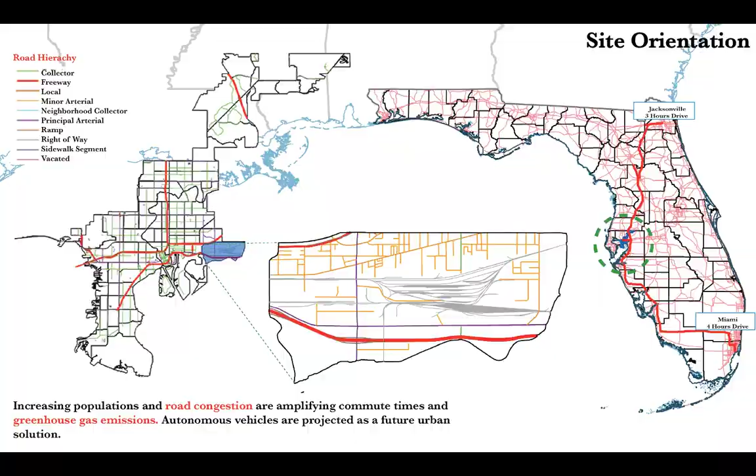Some of the existing issues that we currently have on the site include abandoned roads, unsafe exits, unfriendly pedestrian intersections, and a large parking lot that we're going to talk about later.

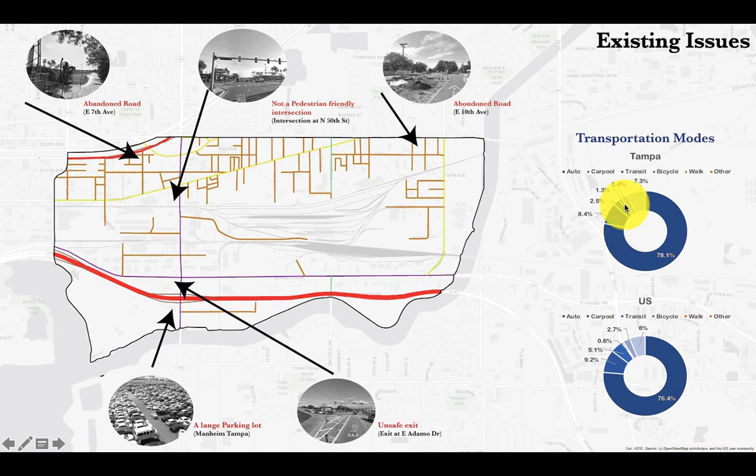To compare the transportation modes for Tampa and the United States, we see that for auto, Tampa has a higher average than the average of the United States, and has a lower percentage for carpool and transit than the average for the United States.

All roads lead to Tampa. It's important to note if our site actually allows for autonomous vehicles if we want to propose autonomous urban solutions. Since 2012, autonomous vehicles have been lawfully allowed on Florida highways, and in 2019, testing of autonomous vehicles was allowed without drivers.

As you can see in green is the Selmon Expressway, which runs through our site. It's a perfect testing bed because it allows reversible overhead lanes, which means that traffic is allowed to flow in different directions depending on the volume of traffic at any given time.

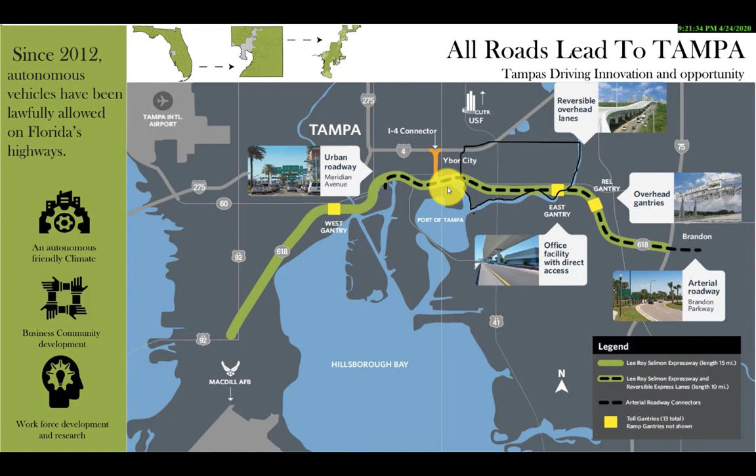Also, it's an urban roadway which allows for diverse modes of transportation and leads to major nodes: downtown Tampa, and the airport. There are overhead gantries to monitor the systems, and office facilities to help navigate the system. Also, it's important to know that this is a major arterial way.

Each year, there is an estimate of 1.2 million deaths worldwide caused by automobile collisions. These levels of automation, shown on the left, and when they were released to the public, shown on the right, were made to reduce this number.

Today, we most commonly see levels 0 or 1 on the road. Level 0 warns the driver of lane departure and blind spots, and level 1 includes features such as cruise control and brake support. For our design proposal, we would like to implement level 4, which is full self-driving capabilities.

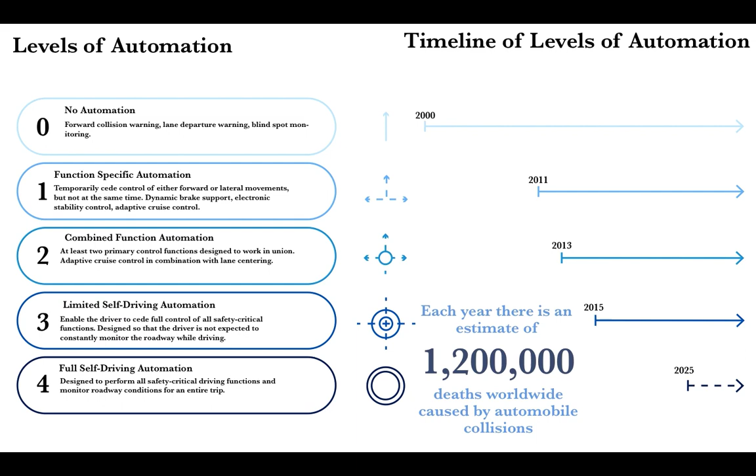We know that there are many pros to implementing autonomous vehicles into everyday lifestyle, but there are also some cons. Starting with the pros, autonomous vehicles are proposed to speed up traffic by 35%, reduce car wrecks by 81%, and reduce fuel consumption by 90%.

On the other hand, autonomous cars have a possibility of being hacked to get a hold of users' personal information and even control of the car. Another con is that with the introduction of autonomous transportation, there is no need for driving jobs, and the result of this is a proposed loss of 1 million jobs. Lastly, the average autonomous car costs about 10 times as much as today's average car.

Transportation is a major contributor to greenhouse emissions. Transportation is the largest source of planet-warming greenhouse gases in the United States, contributing to about 1/3 of those greenhouse gases, with electricity coming a close second. This shows that for industry to be lower, there are more sustainable practices involved.

Part of this 1/3, 250 million passenger cars contribute to 60% of the emissions from transportation, 17% from ships and planes, and 23% from freight vehicles. Between 1990 and 2017, there has been a 22% increase in greenhouse emissions from transportation.

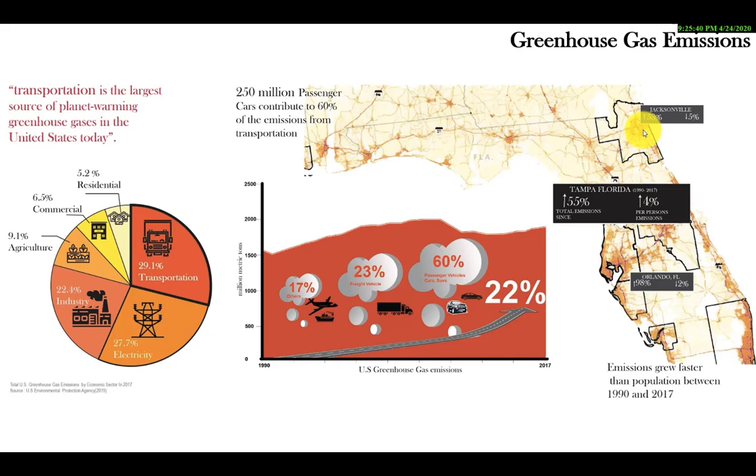In comparison to other cities, Jacksonville had a 53% increase but a 5% decrease in per person emissions, which is the same for Florida overall, meaning that fewer people are using cars, but the population has probably increased in those areas. So after looking at the existing issues, we wanted to know more about Tampa and our site.

So we did a suitability model following those 4 steps. First we identified the related factors, geographic information and traffic related, looking at data cleaning, data organization, and literature review. Then we collected the data for geographic.

We looked at the land cover, population density, building density, and schools. For traffic, we looked at the annual average daily traffic, commute time, and speed limit. Then we created a rating system from 1 to 5, 1 being the least and 5 being the most.

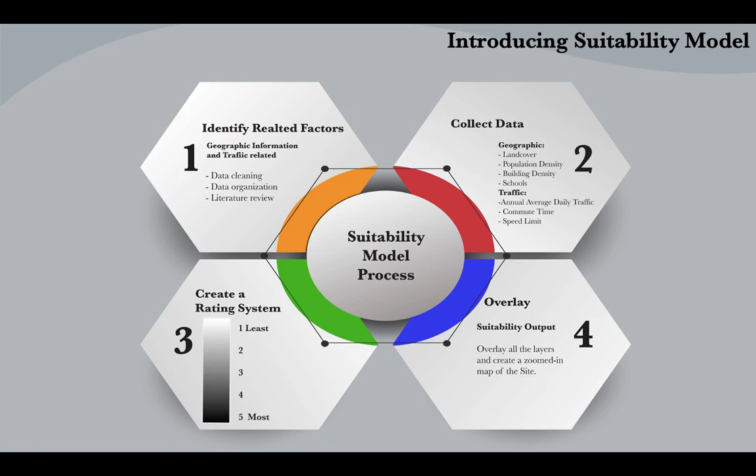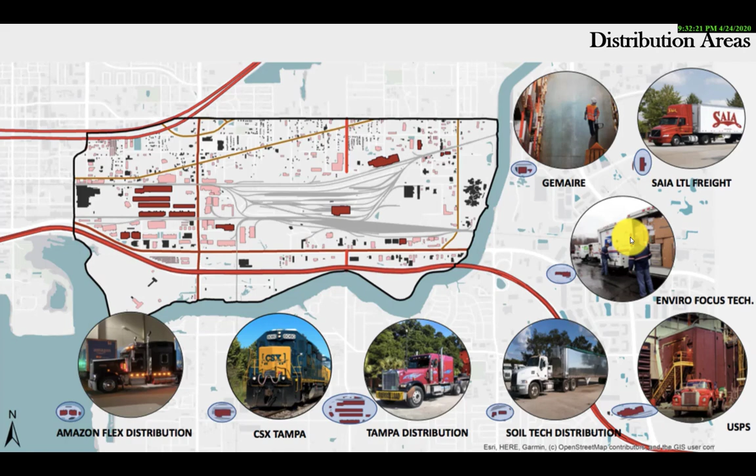This map shows the road hierarchy highlighting the current freeways, principal arterials, minor arterials, collector roads, local roads, and railroads in our site. As you can see, there are two main freeways that run through our site, which makes our site a good location for the introduction of autonomous vehicles in Tampa.

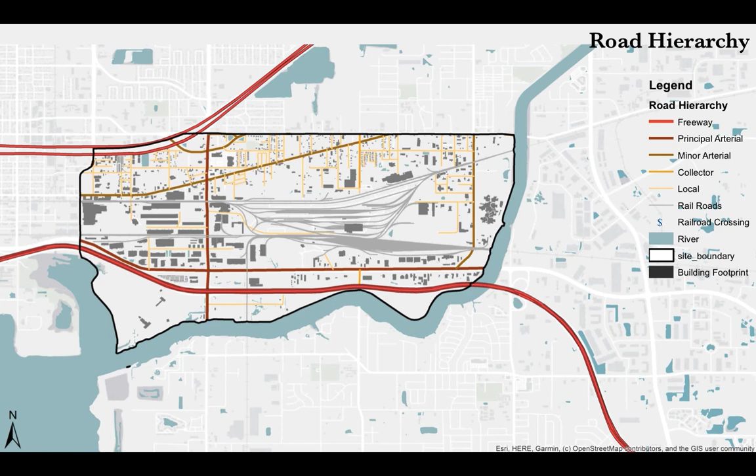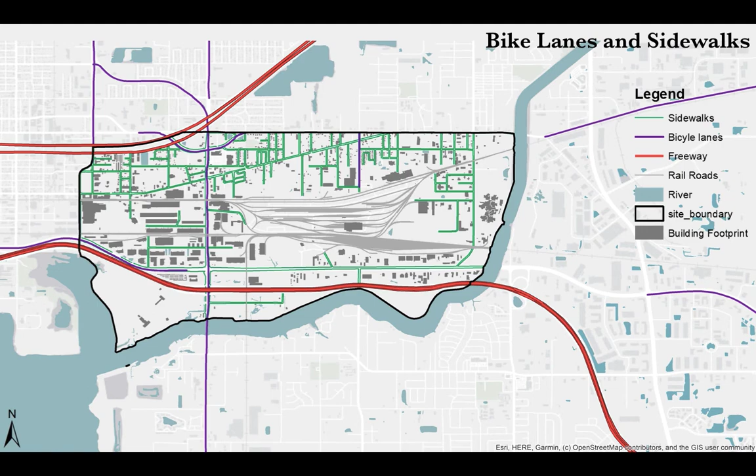This map shows the existing sidewalks and bike lanes in our site. As you can see, there are very few bike lanes located in our site. This is another site issue we are going to fix.

Here we show existing bus routes, and we have the HART Limited Express routes, which runs along the Selmon Expressway. We have 60LX that runs from Fish Hawk to South Tampa. We have 24LX that runs from Bloomingdale to South Tampa.

We have the Cross County line. We have the Brandon and South Tampa lines. Also, we have the HART Local routes that run through N50th Street along our site, and you can see that we have different bus stops along this route.

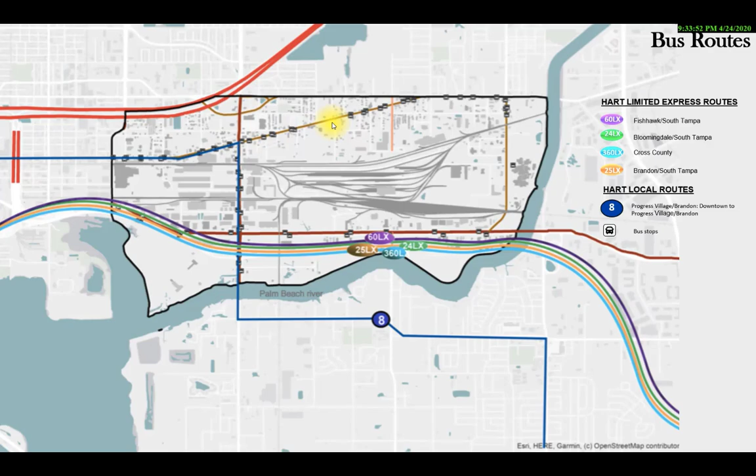This is the existing cross-section of the Selmon Expressway located in our site. As you can see, there are two levels to this freeway, one main upper level that has 3 lanes and two lower levels that have 2 lanes.

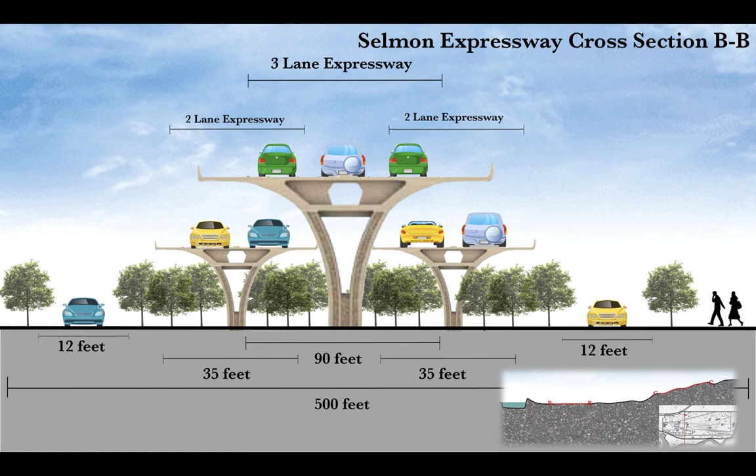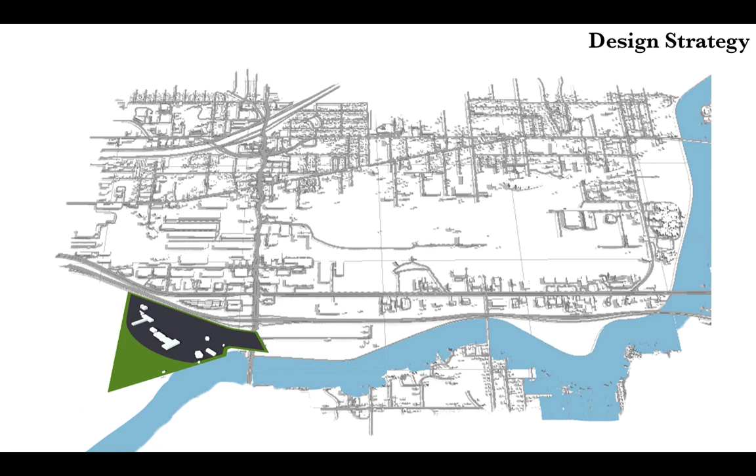This next cross-section shows the commercial area that our group is redesigning into a mixed-use area. Currently, this commercial area is located on one of the main principal arterial streets in our site and has 3 train tracks crossing over on the street. Considering all the current opportunities and issues with our site and the surrounding area, our group has decided to design an autonomous hub. This implementation and other design strategies will be explained in the following slides.

This graphic shows the external bus routes in Tampa. We decided on 4 possible locations for the buses based off the everyday behaviors of the population. The first location, the University of Tampa, was chosen because it is the biggest university in the city, and college students typically will look for other forms of transportation besides driving if convenient for them.

The next location is downtown Tampa. This is a very commonly visited spot in the city and includes many different restaurants, bars, and offices. The next location is the Channel District, another popularly visited area where many museums and an aquarium are located. Lastly, Uptown Tampa is a large residential area and also the location of an amusement park and some botanical gardens.

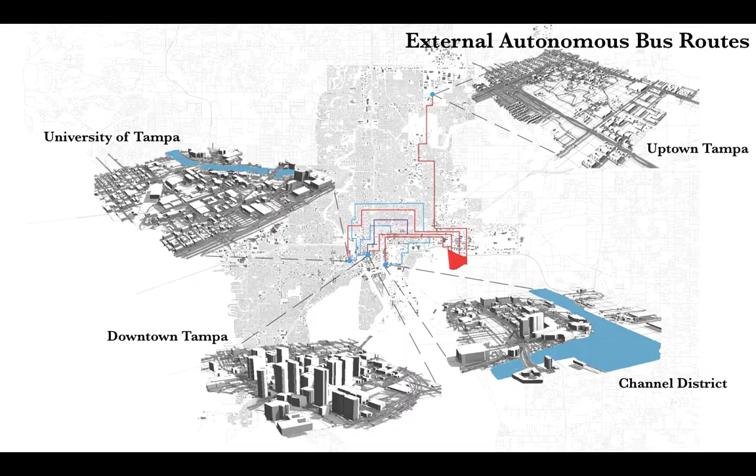And this is our second design strategy. We intend to create internal autonomous transit routes within our site, and we would have the Auto Hub providing different forms of transportation and a multimodal transit system where we would have autonomous vehicles, autonomous buses, e-bicycles, e-scooters, trams, and of course water taxis. And with all of these systems, we would have a seamless integration providing real-time information, and we will provide this real-time information with the use of an integrated monitoring system.

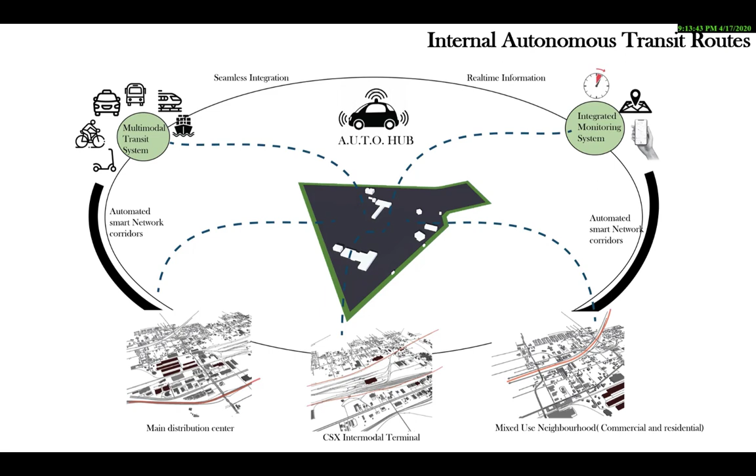So our users will be able to know exactly when buses are available, and also encourage ride sharing. With this integrated monitoring system, we would have automated smart networks, so this would be different stations within the site where people can actually charge these vehicles and also order from some of these vehicles. This autonomous transit routes would serve 3 basic areas in our site, which would be the main distribution area, the CSX intermodal terminal, and the mixed-use neighborhood, commercial and residential.

Since 1/3 of our site is in the 100 year floodplain, we thought about protecting it from flooding, like doing a mobile flood protection wall that would be put in place whenever needed, as well as elevating buildings and adding greenery surrounding the site.

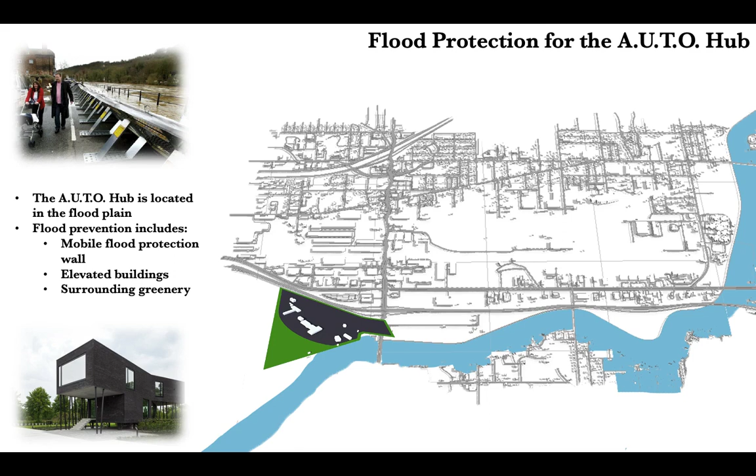While taking ideas and designs from our 3 design strategies, we created our master plan. We focused our designs to be based on our new autonomous transportation systems. Our main design focus was the Auto Hub and the connections to it and around the site. These labels on our master plan show our ideas and purposes for each section of our site, starting with the main focus of our site, the Auto Hub, labeled as 1. The Auto Hub is where all of our forms of transportation we are implementing is located, besides the trains.

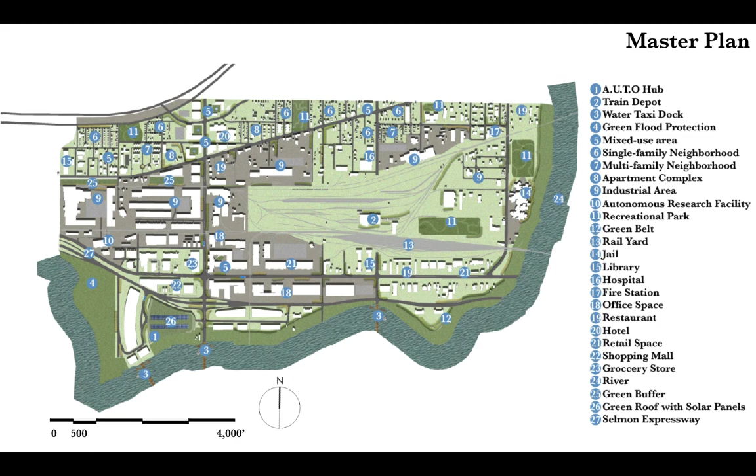The train depot is located at number 2 and is the main train station for both transportation of people and supplies. The next form of transportation is the water taxis. These 3 docks located at 3 are where people can get on water taxis and take it anywhere along the river, including downtown. Another focus of our site is the Autonomous Research Facility, located at number 10, where our autonomous vehicles will be tested and repaired. Other changes made to the site include the mixed-use area located at number 5, multi-family housing located at 7 and 8, and commercial areas that were repurposed into retail areas, office spaces, restaurants, grocery stores, and a mall.

This is our proposed land use map, of which our programming is influenced by, and here you see that our site is divided up into 10 different areas.

So here you see the single family units on the northern side of our site, and we've more or less retained these areas. Also, we have the multi-family areas on our site, and we've located this around single family to sort of create a sustainable economy within the site and within these areas. We also have the heavy commercial, which is along a major intersection on our site and also close to the hub. We've done that because we want to attract people to these areas and encourage the use of public transportation.

Also, we have light commercial, which we've placed along some of the major arterials and also around single family and mixed use family to encourage the work-life balance for people.

So people can walk around their homes and also run businesses and small businesses. Also, we have the mixed use development, which is quite important to our site because we wanted to also create a high density area on our site, and this is in conjunction with the city's land use map 2.11, the land use policy that says the city would like to encourage high impact density areas and also take advantage of major transportation roads, major transportation corridors.

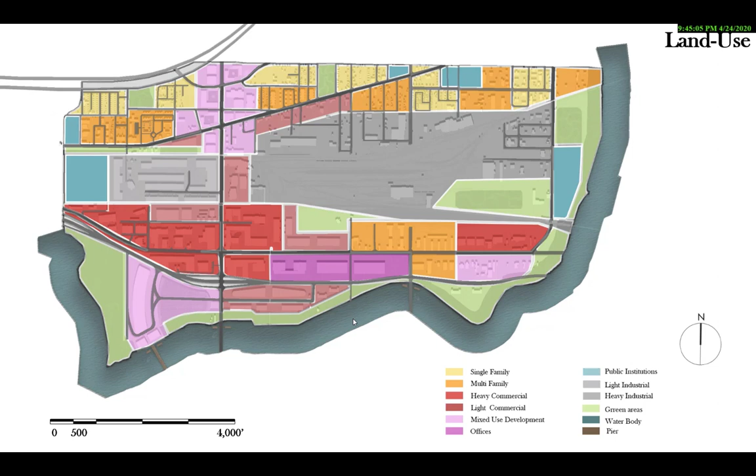Here we have the road hierarchy map, and in maroon we have the principal arterial, which is the Selmon Expressway, and feeding off, in black you have the minor arterial, which feeds off of the principal arterial. It's important to note that we've created a major loop around the site with the minor arterial, creating a good and sustainable transportation network.

Also we have the collector roads, which feed off the minor arterial and then onto local roads. Initially, the site had a lot of local roads that ended abruptly, but we've tried to create an integrated system to encourage public transportation within the site.

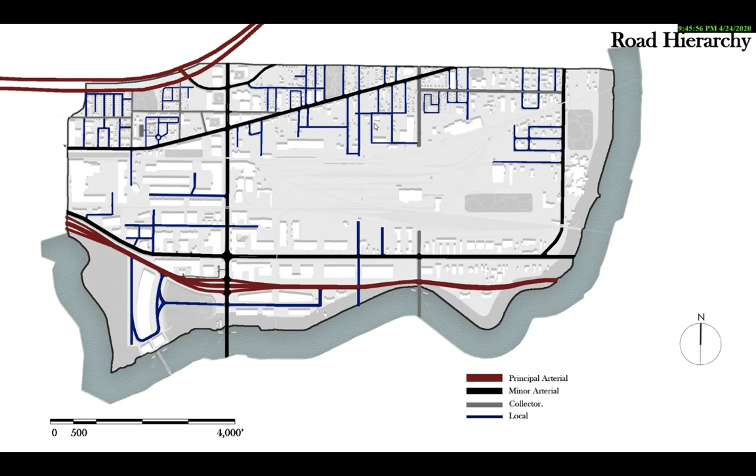Here we have green connectivity, which we've spoken about in the land use map. So we have parks and recreation. These we have located within residential areas to encourage that active living lifestyle in these areas.

We have the industrial and riparian buffer, which helps with the mitigation of flooding and the purification of industrial waste before it gets to the river.

Also, we have the rail yard corridor, because as much as we want the rail yard to be all industrial, we would like for it to have green spaces around to create a sustainable environment.

Also, we have greenways. This is really to foster public transportation and the use of multimodal systems of transportation. So with the green belt around the roadways, this encourages people to walk, to ride their bikes, and this also helps with runoff from the roadways as well.

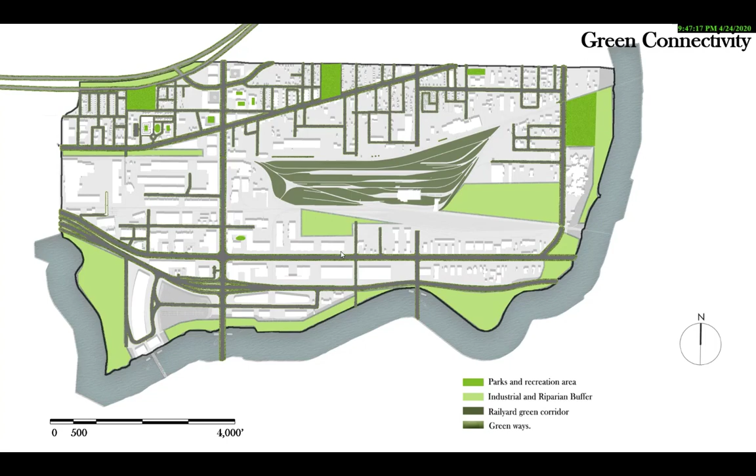This map shows the highlighted buildings that we decided to keep as they are on our site. We decided to keep 910 buildings on the site. The majority of these buildings are currently single-family housing, industrial sites, and public institutions. We felt it was important to keep these three types of buildings as they are and follow their current land use policies.

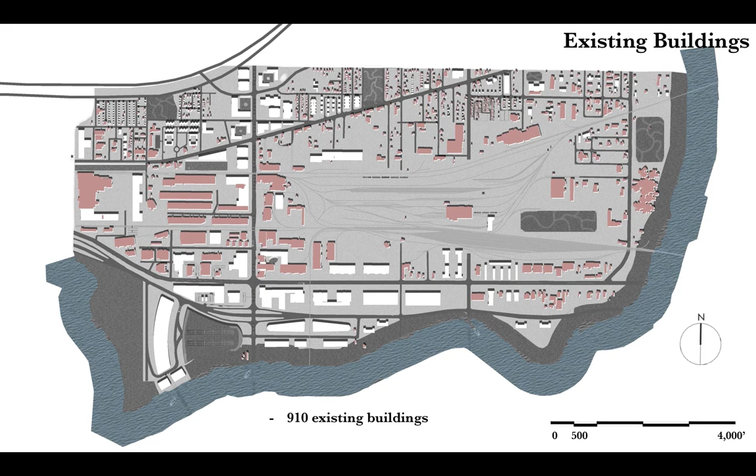This map shows the new and repurposed buildings on our site. 189 buildings were removed from the site and 194 new buildings were put in their place. These include new transportation-related buildings, mixed-use buildings, multifamily complexes, and some commercial areas that we repurposed.

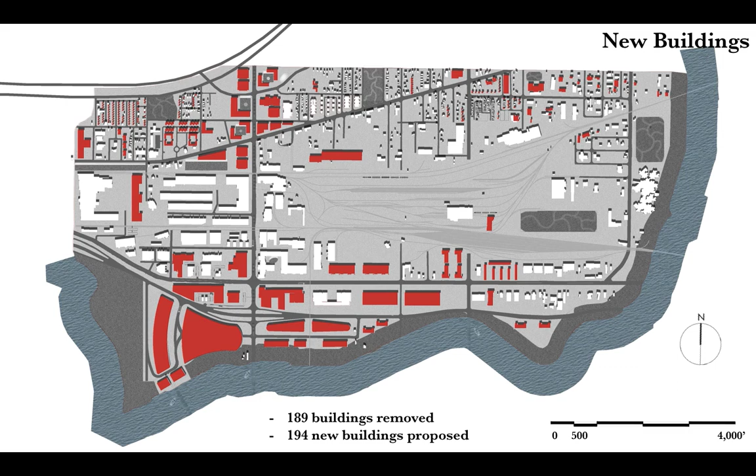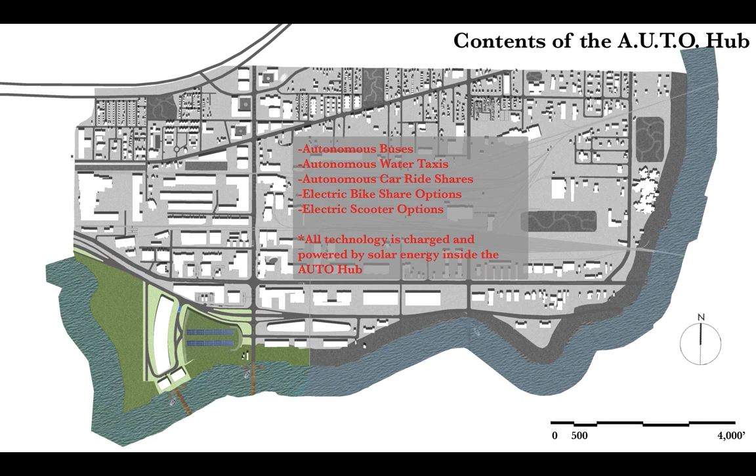As discussed previously, this is our Auto Hub. Our Auto Hub has the technology and equipment for all of the forms of our autonomous transportation. This includes buses, water taxis, car ride shares, electric bikes, and electric scooters. All of this autonomous technology is powered by solar energy to reduce the carbon emissions, which is one of the current issues on our site.

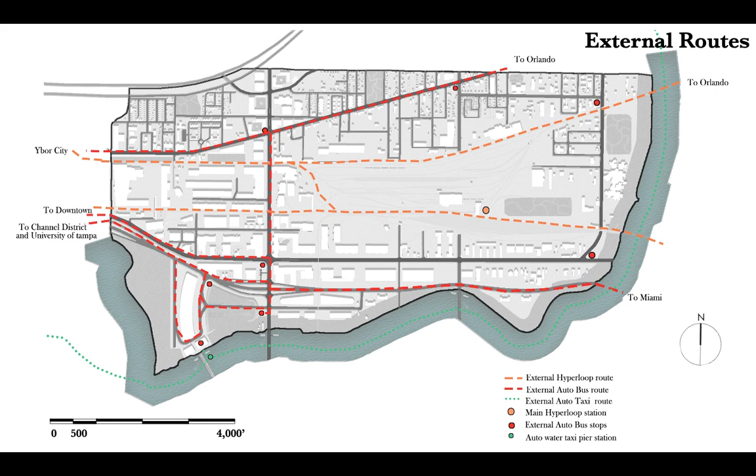For the external route, we will have the Hyperloop in orange, which will go to different cities in Florida, and the red here is the external auto bus route, which will go to Channel District, University of Tampa, as well as different cities in Florida. We will also have the auto water taxi, which is in green right here.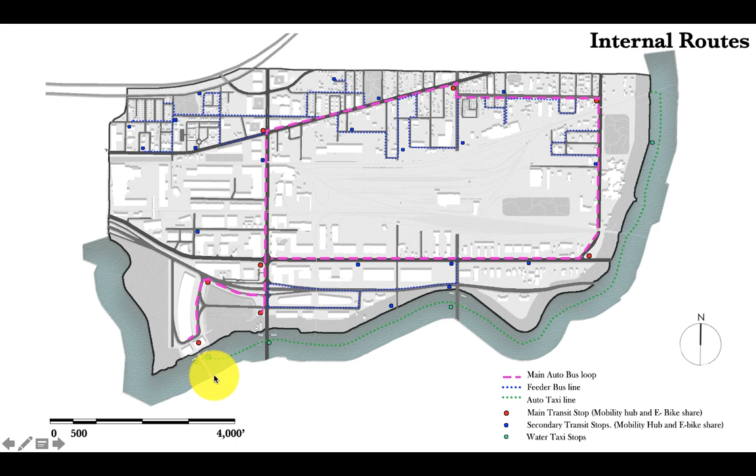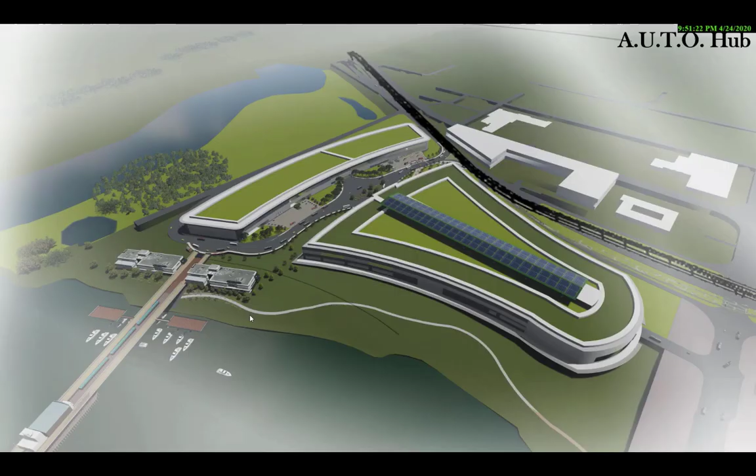Here we have a zoomed in aerial of our hub, showing its relationship to the Selmon Expressway and how there's a loop in which the buses, cars, and automated vehicles flow through the hub and out, and also this way. Also, we have a green roof on the hub because we know our site is on a floodplain, and this helps with the mitigation of flood stormwater.

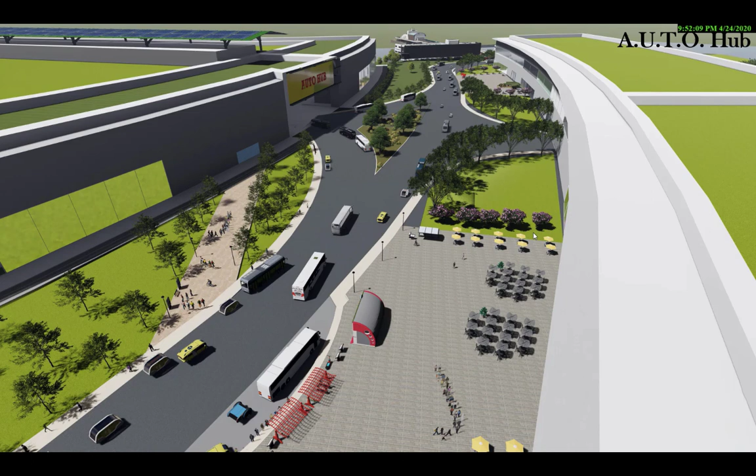Also, we have solar panels that help with provision of energy. Here is just a perspective showing the busyness of the hub and how traffic flows through. This is the one-way street that goes round the hub and out, and also goes into the hub and out.

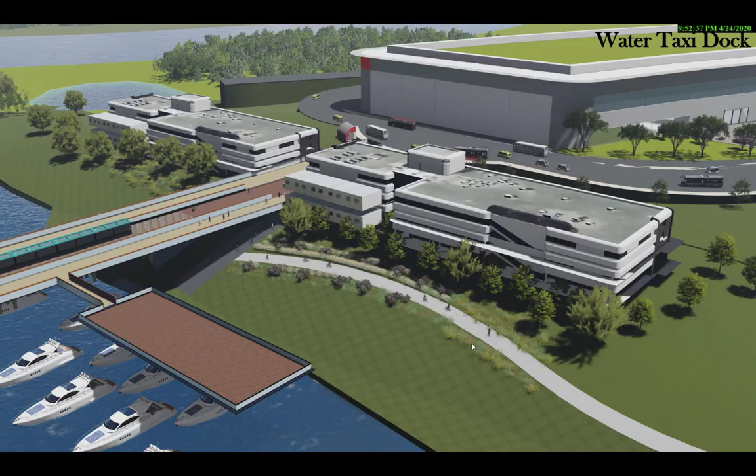And here we have dining, outdoor dining. We have a bus stop, bicycle racks, and these are just some of the AV vehicles. Here we have the water taxis, and a station and drop-off area for people that want to take water taxis. We have this trail corridor that runs along the riparian buffer so people can still access the water taxi and the hub from this part of the site.

This is the first section, located right here at a mixed-use area. We have kept the same street width, however, we completely redesigned it to add a bike lane barrier, as well as the transportation lane. Those bike lane barriers will also be used as small platforms to get on those transportation services. Some of the design also includes permeable paving, which will enable infiltration of stormwater runoff, and virtual system screens.

Virtual system screens to order an autonomous vehicle from the depot or the hub, reflective coating, which is a paint to help with the urban heat island on the road, as well as green rooftops, which will help also reduce the volume of stormwater.

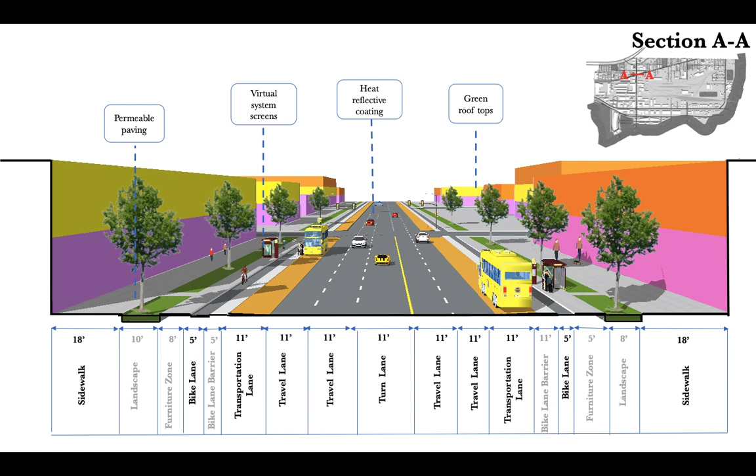For the second section, it will be located right here at an industrial area. We have completely redesigned this area to add tram, the Hyperloop, and way more green buffer area to help reduce the pollution coming from those industries.

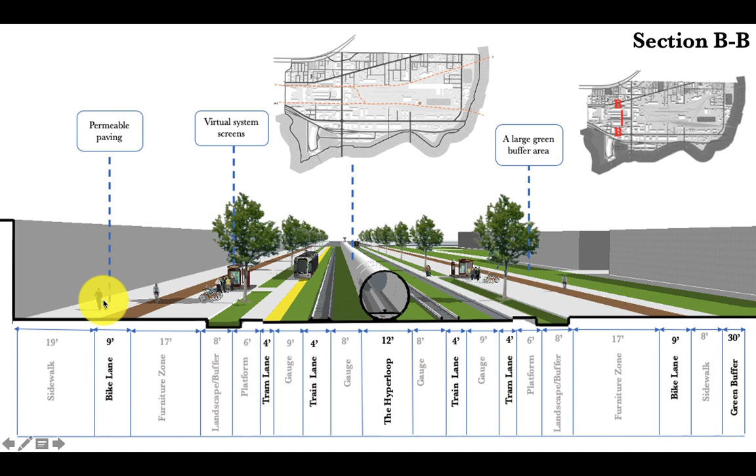For the Hyperloop, this is a map showing the route in our site. There will be a main stop right here at the depot, and there will also be permeable paving as well as the virtual system screens.

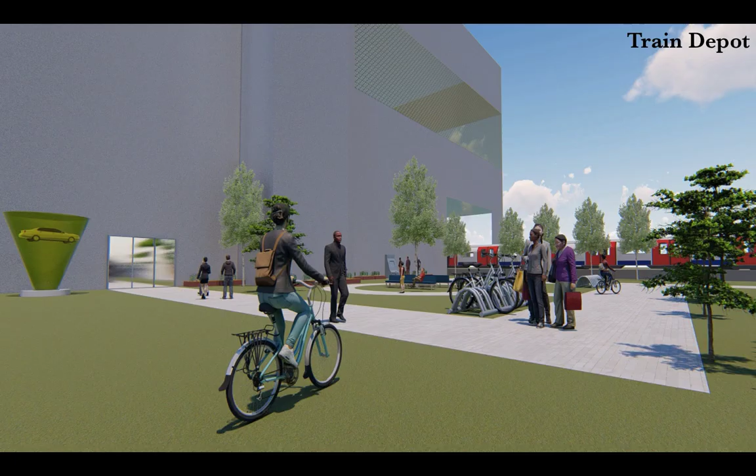This perspective drawing shows the train depot located in the existing rail yard in our site. The train depot is used as a large train station and as a stop for the Hyperloop. This also shows the public interaction around the depot and the new and futuristic technology to order train tickets.

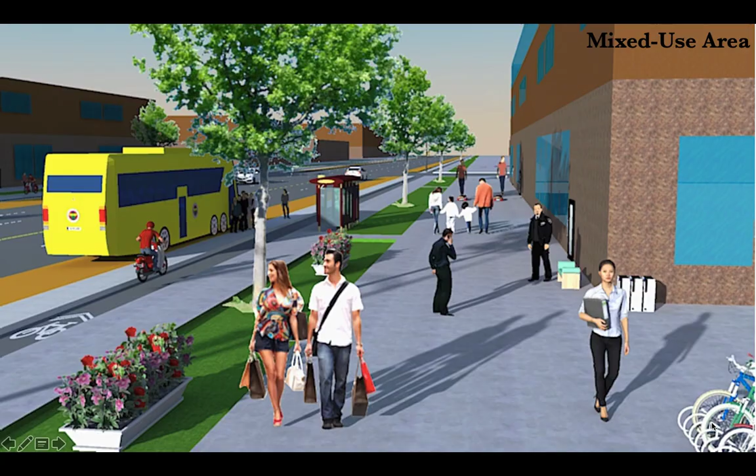For this perspective, it's located at the mixed-use area, showing the different interactions and activities going on.

And finally, for potential funding options for the project, there are three different ones we're going to talk about. So first, for debt, it could be private debt. The money can be borrowed from industrial loan companies or commercial banks.

It could be bond financing, which is typically offered with a lower interest rate by issuing bonds instead of borrowing money from private lenders. And specialized debt infrastructure: the local government can also access debt mechanisms designed by the state or federal government to help finance particular types of infrastructure.

Second are grants. Those don't have to be paid back. It's usually offered by a higher level of government to a lower level. So, for example, the federal transportation grants, so Tampa could access these funds through the State Department of Transportation.

And finally, equity. So equity allows for private entities to invest a stake in infrastructure expecting a return. This is usually available for infrastructure that generates a huge return. So it would be infrastructure investment funds, which are pools of funds collected from different investors to invest in the infrastructure, or public-private partnership, which is an agreement between the private sector and the public agency where the assets and skills of each are shared to deliver a service. Thank you.